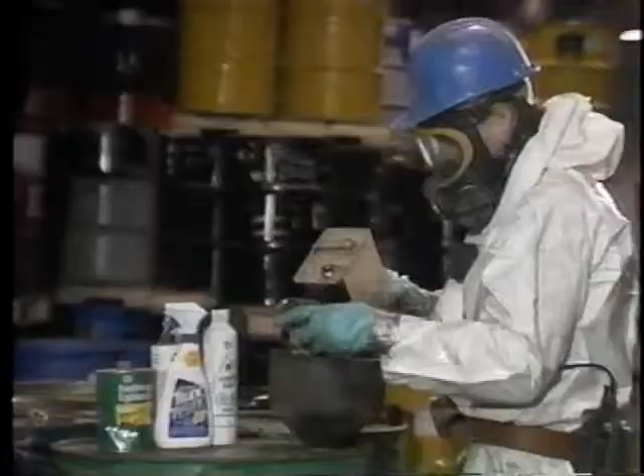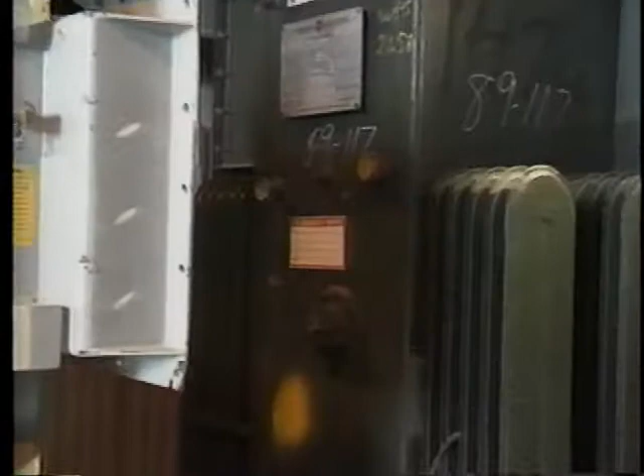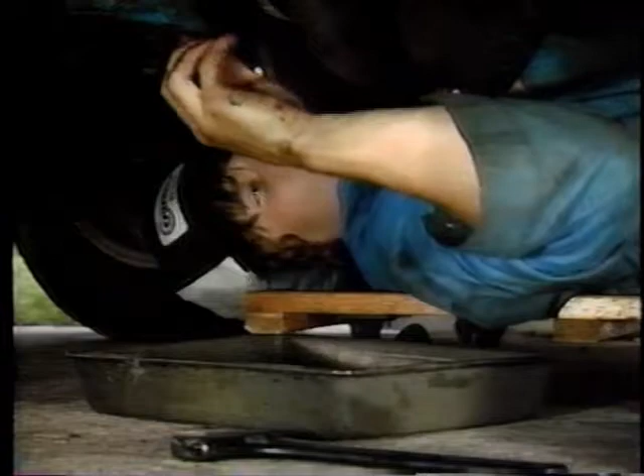Since opening in 1987, the Alberta Special Waste Treatment Centre has become a vital part of the solution to a tough modern problem: how to safely dispose of the hazardous byproducts of our 20th century technology. Some of this special waste is produced by industry, but as consumers, each one of us also contributes to the special waste problem. Chemical leftovers, contaminated containers, they're all part of our way of life. But these and other materials are difficult to dispose of safely.

Concern for our environment has produced a commitment to reducing our production of waste, recycling what we previously dismissed as garbage, reusing materials instead of throwing them away, and recovering useful products from waste. These 4 R's are an important part of the solution. But there will always be residues which we cannot and should not flush down the drain or pack into our landfills.

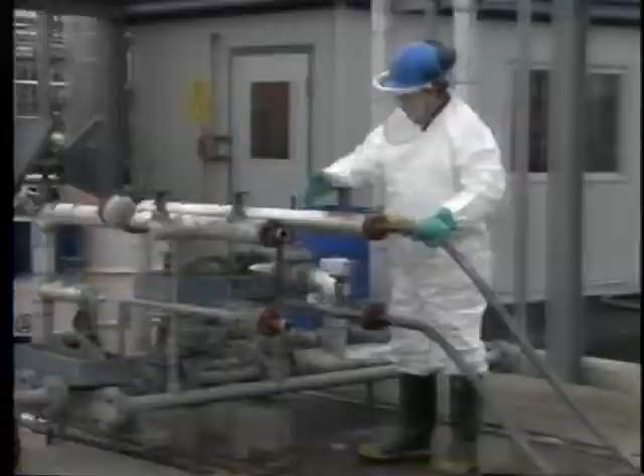Protecting human health and the environment from hazardous waste requires a last resort: special waste treatment. In the 1980s, the Alberta government recognized the need for a centre to dispose of special wastes produced in the province. An independent international review panel chose Chem Security, a subsidiary of Bovar Incorporated, to design, construct, and operate the treatment centre. The provincial government conducted a site selection program, and several Alberta communities volunteered for the centre.

Detailed engineering and environmental studies showed that the Swan Hills area could meet the stringent criteria established for site selection. After full consultation with local residents, a site was chosen. Today, the centre is the hub of the special waste management system operated by Chem Security Alberta Limited and overseen by the Alberta Special Waste Management Corporation, a provincial crown corporation.

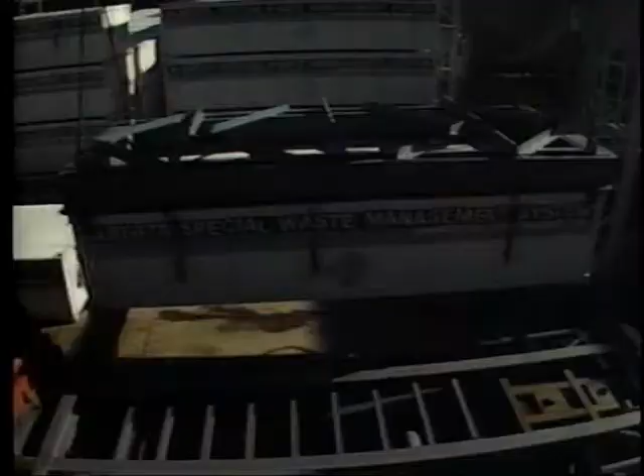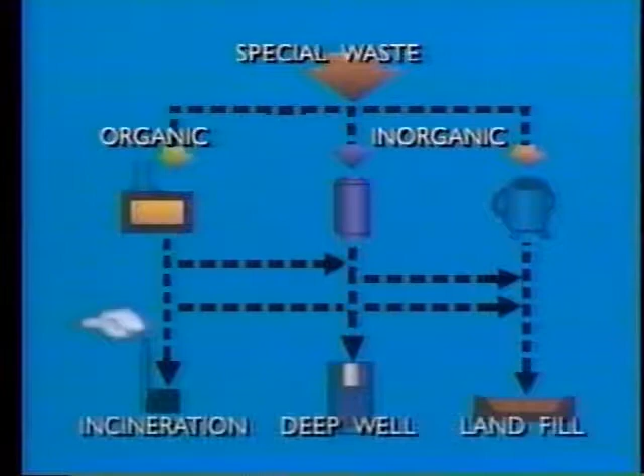The Alberta Special Waste Treatment Centre is the first of its kind in North America. What distinguishes the centre is that it is capable of treating all classes of waste generated in the province, with the exception of radioactive and explosive wastes. It treats both organic and inorganic waste in both solid and liquid forms. There's a prescribed treatment for each kind of waste.

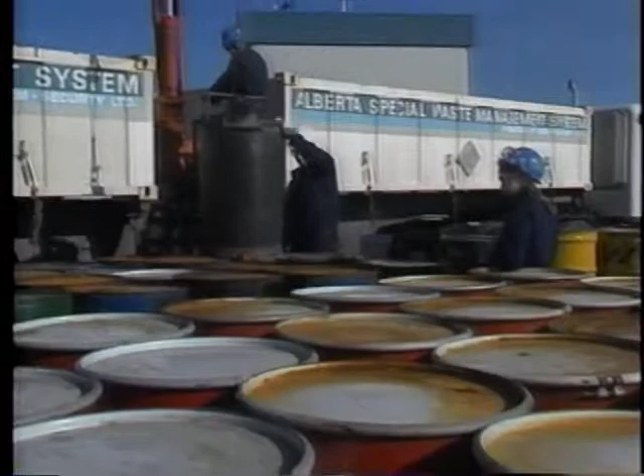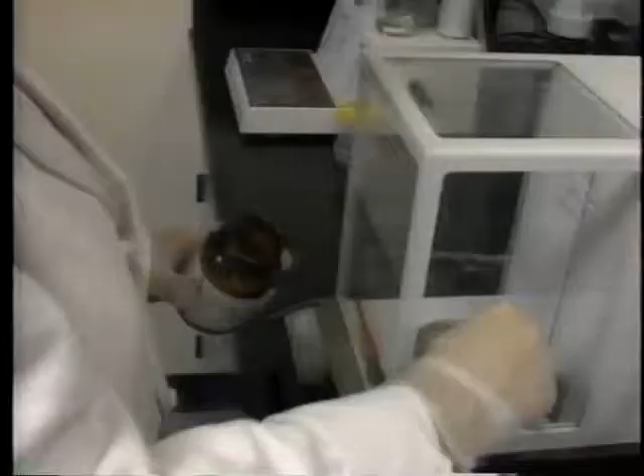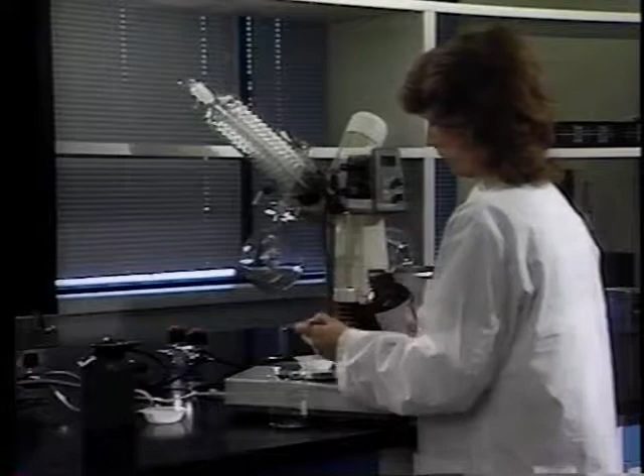Much care has gone into designing this safe system for the collection, transportation, and treatment of special waste. Before a load of waste ever sets out for the centre, the generator must provide information about the waste, including its chemical composition. This often requires analysis by an independent laboratory. The contents of every load must be documented, and every load is tracked from source to destination. When a shipment arrives, the centre's laboratory conducts an analysis before accepting the load for treatment.

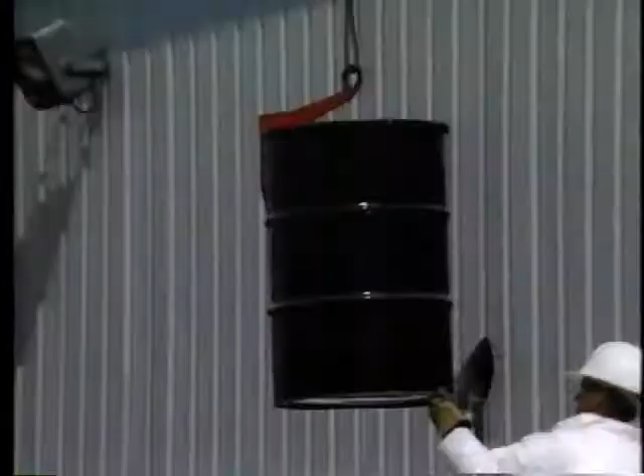To protect people and the environment, stringent regulations govern the transportation of special wastes to the treatment centre. Trucks have been specially designed for protection within protection. For instance, drums and other waste containers are themselves enclosed within containers.

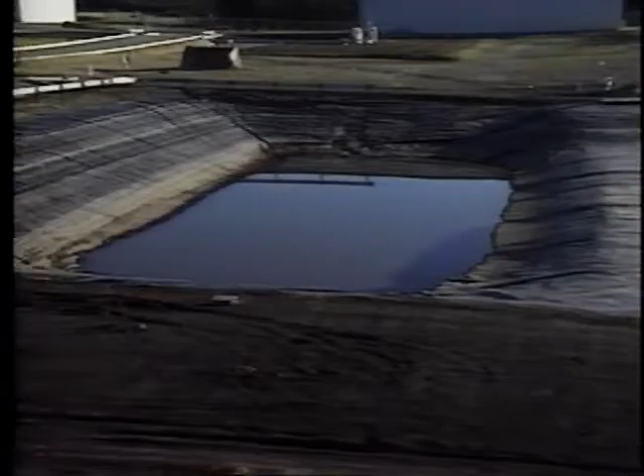Like the container trucks, the centre is built on the idea of protection within protection. An internal drainage system allows no substance, not even rainwater, to leave the site. And the areas where the waste is stored before treatment are surrounded by berms to contain any possible spills.

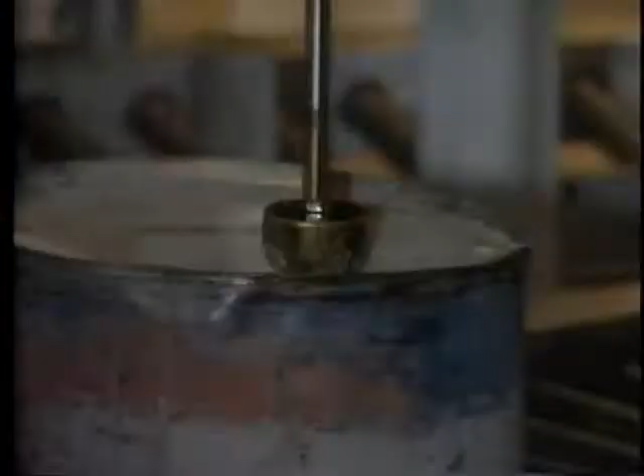Drums containing liquid wastes are emptied. Their contents are piped to the specific location in the plant appropriate for their treatment. Some special waste arrives by tanker, and it is pumped immediately into storage tanks.

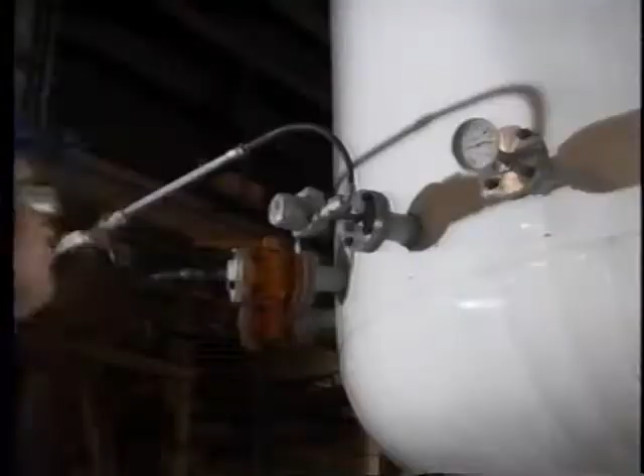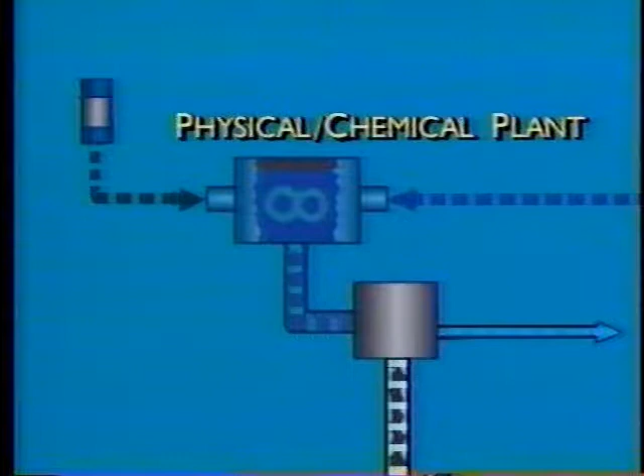Inorganic material, such as acids, sludges, metal-bearing liquids, and caustics, are treated by either physical or chemical processes here in the physical chemical plant. The objective of this plant is to destroy hazardous inorganic compounds or to concentrate and remove them for further treatment. One common process is neutralization.

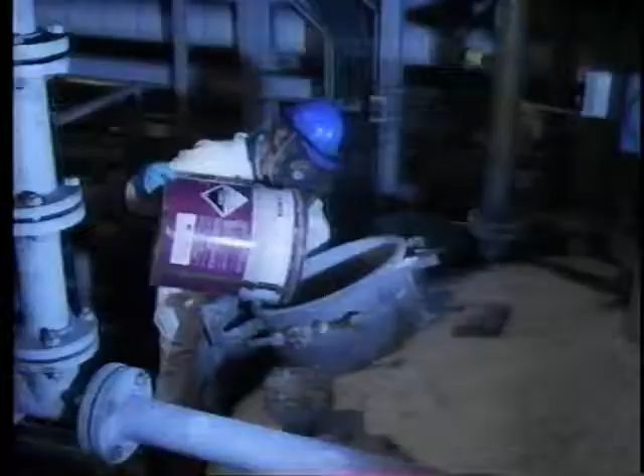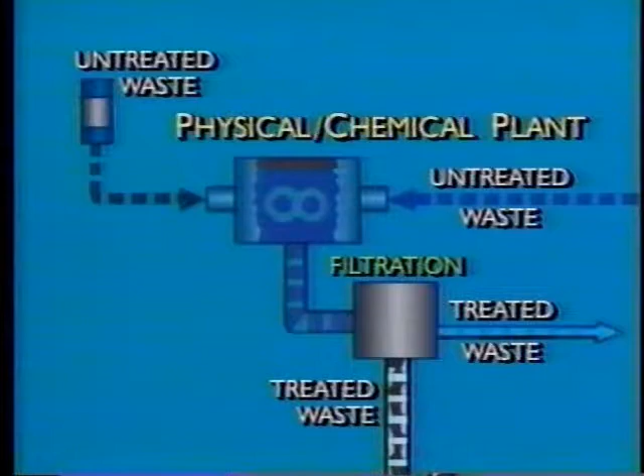For example, inside these reactors, potentially harmful acids, such as hydrochloric acid, can be neutralized in a base reaction process. The end product is harmless: salt and water. Another process is filtration. In these pressure filter vessels, solids and liquids are separated before receiving further treatment.

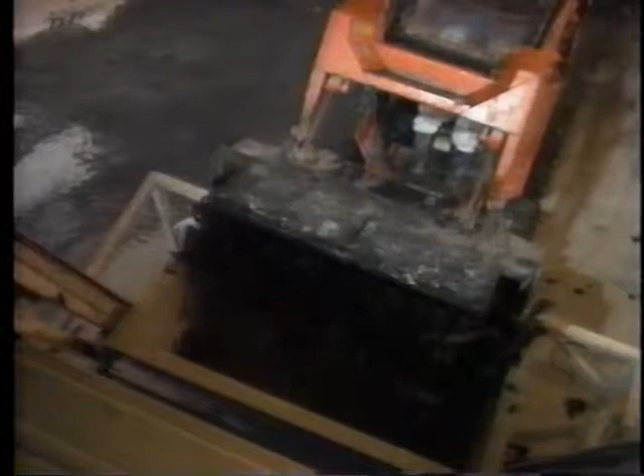Even contaminated drums are treated. The shredded drums and other solids produced by the various physical-chemical processes undergo further processing in the stabilization plant. Here, these solid residues are mixed with lime and cement to form an environmentally safe material, and finally deposited in covered landfill cells.

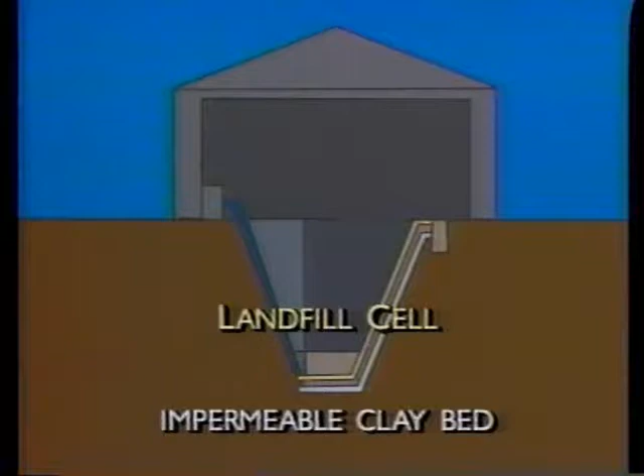These secure landfill cells are designed to safeguard against any contamination of groundwater. The cells are set in the impermeable clay soils that characterize the area, one of the reasons this plant site was chosen. Each cell is lined with a heavy synthetic liner and covered with a rigid, weatherproof building. When a cell is filled with solids, it is capped with a high-density polyethylene liner, welded shut, covered with clay, and revegetated.

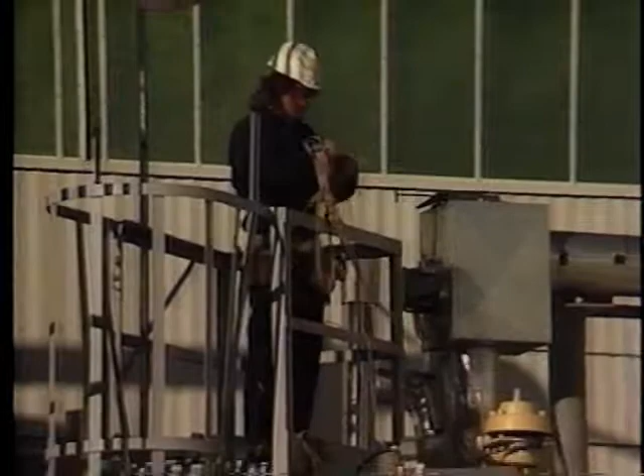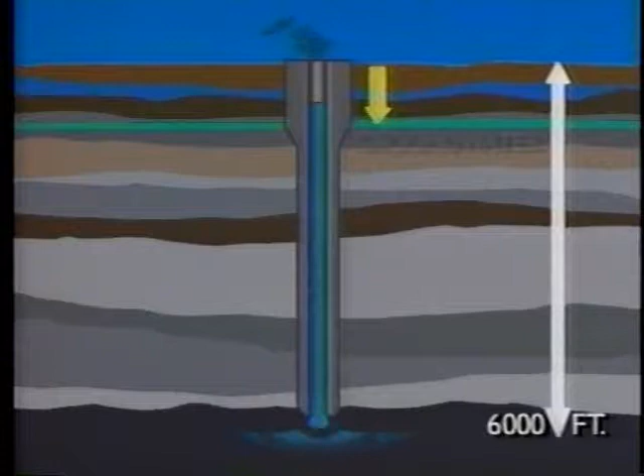Any liquids remaining from the physical chemical treatment processes are stored in these tanks. The water is tested and further treated, if necessary, before being pumped down a deep well, more than a mile below the site. The well extends far below the zone which is the source for groundwater. The walls are doubly protected to ensure no leakage takes place, and the integrity of the well walls is constantly monitored to ensure the well is secure.

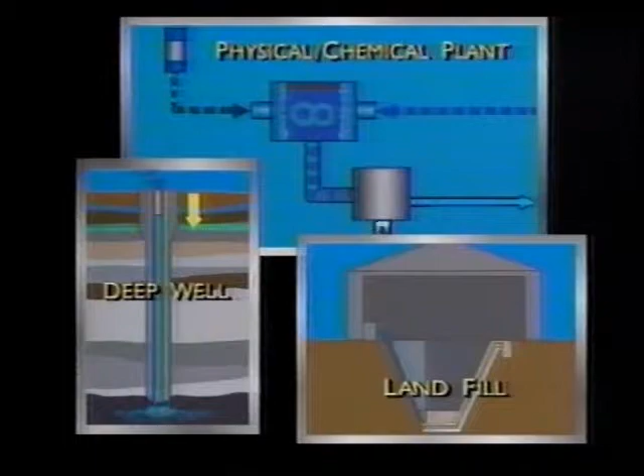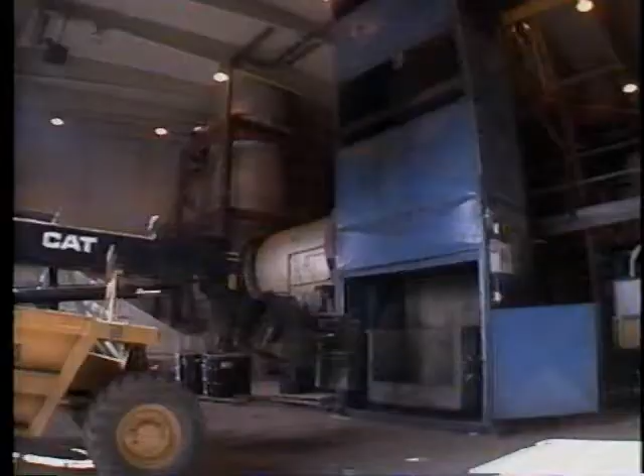That's how inorganic wastes are treated at the center. But most of the wastes produced in Alberta fall into the category of organic wastes, things such as oils, sludges, contaminated soils, and PCBs. At the treatment center, organic wastes, whether liquid or solid, are incinerated. Solid organics may be shipped in drums or in bulk. They are packaged and stored here prior to incineration. The building is heated, making the center a more efficient year-round facility.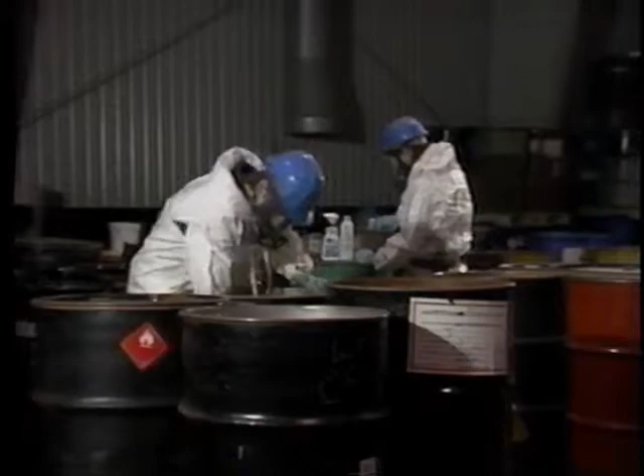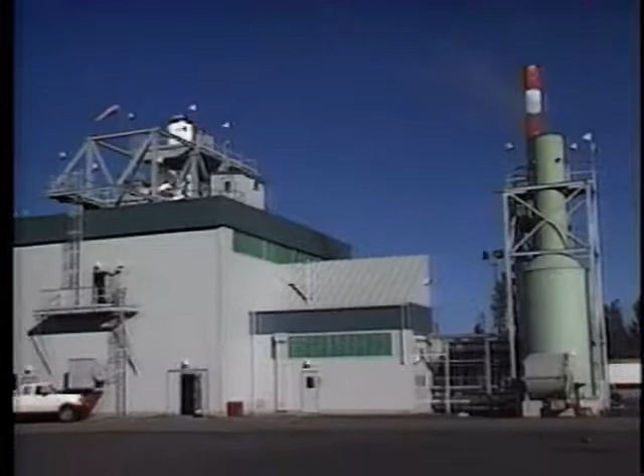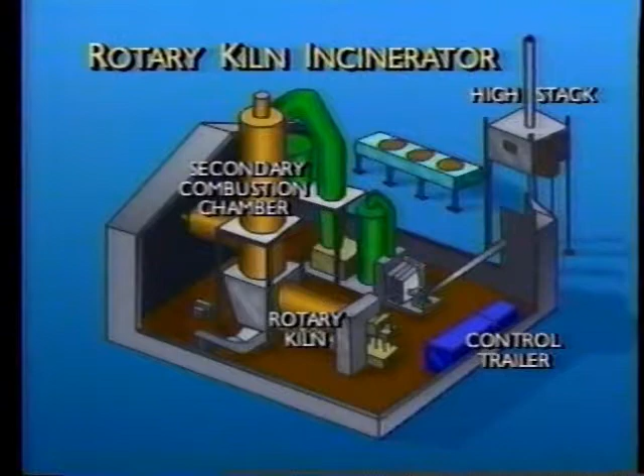Liquid organics often arrive in drums. Their contents are first stored in these tanks, according to type of waste, and then pumped to one of the center's incinerators. This rotary kiln is one of two incinerators used at the center. It was designed to process liquid organic wastes and small quantities of solids. Although it can handle all forms of organic waste, this rotary kiln was installed in response to the growing demand for the disposal of solid organic waste.

In both systems, drums to be destroyed with their contents are conveyed to the incinerators and lifted for insertion into the kiln. Bulk and packaged solid wastes are shredded to a uniform size before entering the kiln. Liquid organic wastes and sludges are pumped into the combustion chamber.

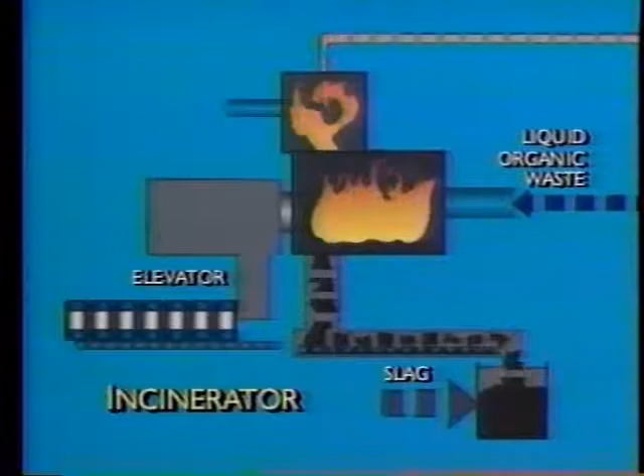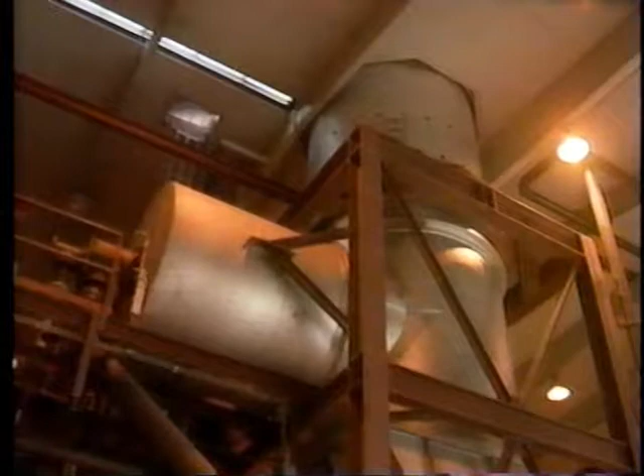Operating temperatures range between 800 and 1,000 degrees Celsius in the first combustion chamber. Solid waste is processed for a half hour to an hour, depending on its composition. Wastes are destroyed in the secondary combustion chamber, where temperatures in excess of 1,200 degrees Celsius are maintained. Clean slag is removed from the kiln. It's tested, stabilized if necessary, and placed in the center's landfill.

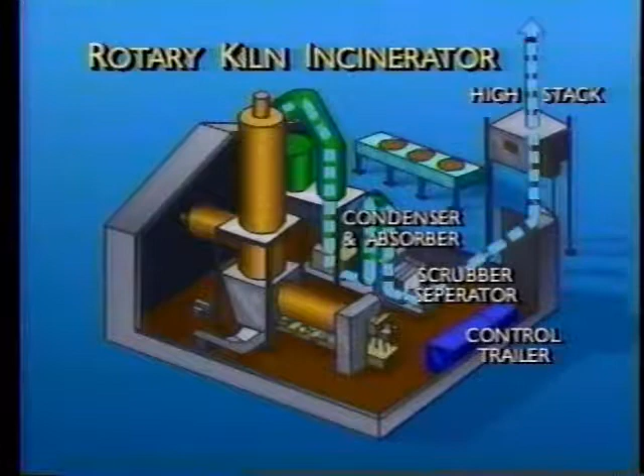Gases are cooled and cleaned in a state-of-the-art air pollution control system before being released to the atmosphere. The incinerators must meet stringent emission and air quality guidelines to comply with both the center's license to operate and provincial environmental regulations.

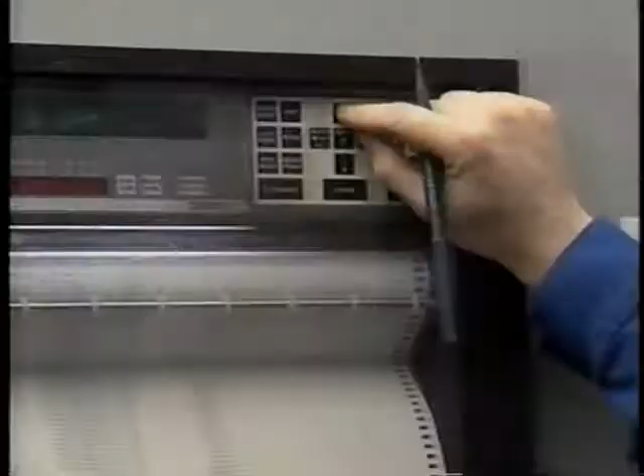The flow of material to the incinerators and every detail of the process is controlled here. These instruments act as the brain of the system, telling the operators what's going on in every aspect of the incineration process 24 hours a day.

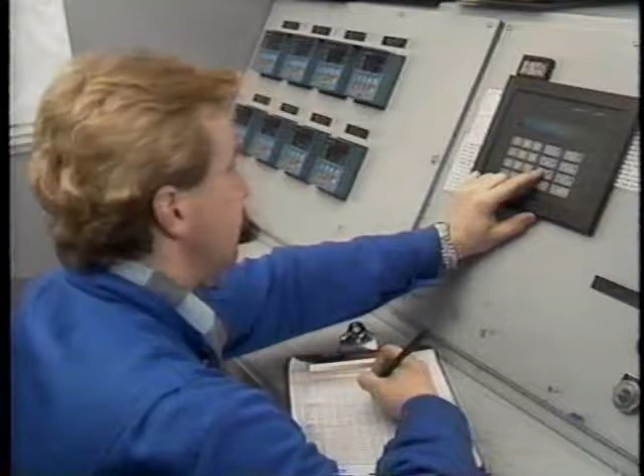Another control room oversees the entire center, from the contents of the various storage vessels to the purity of the gases released by the incinerators and the quality of liquid injected in the deep well.

Another key responsibility is protecting the safety of workers at the center. An important part of this task is ensuring the correct protective clothing and equipment is provided and used. An active occupational health program includes regular medical tests of workers and intensive training and education to prevent harm to workers. The center also has a vital responsibility to prevent harm to the environment.

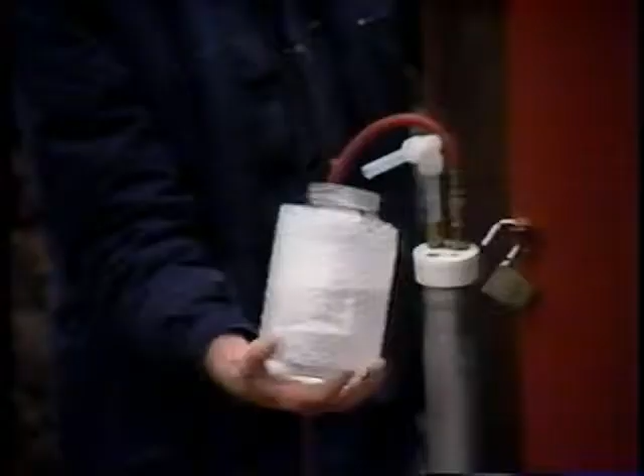Its comprehensive long-term monitoring program includes this station, which continuously checks air quality. Scientists regularly study the environment around the treatment center to detect even the slightest deviation from the norm. Over $1 million is spent annually to ensure the protection of the air, soil, water, aquatic life, wildlife, and plant life. To ensure hazardous substances never leave the site, equipment and trucks must be washed before they're permitted to leave.

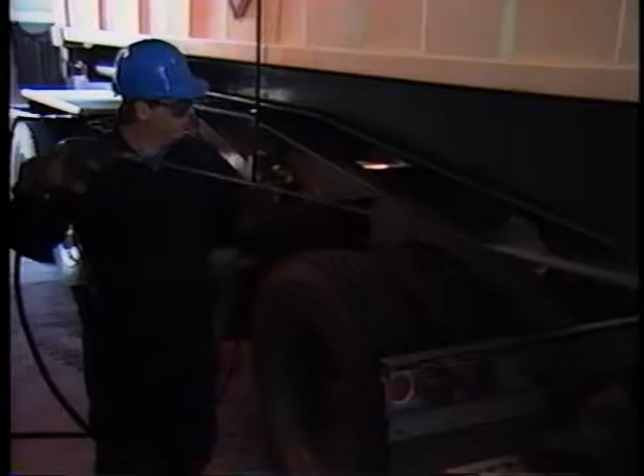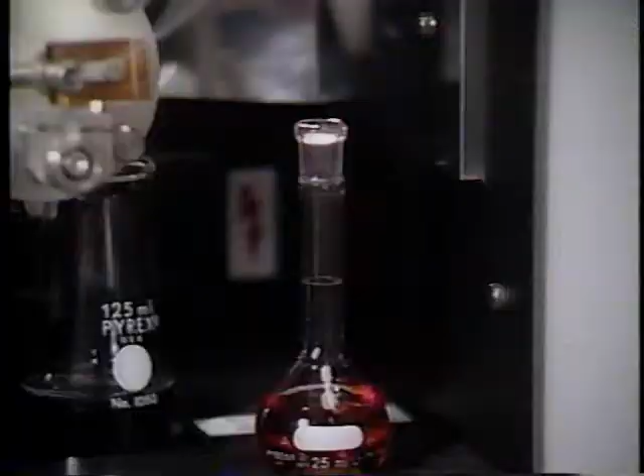Safety and environmental integrity. These are the guiding principles of Alberta's Special Waste Management System. Chem Security at the treatment center near Swan Hills has accepted responsibility for ensuring Albertans a successful response to a major concern: protecting human health and the environment from hazardous wastes.